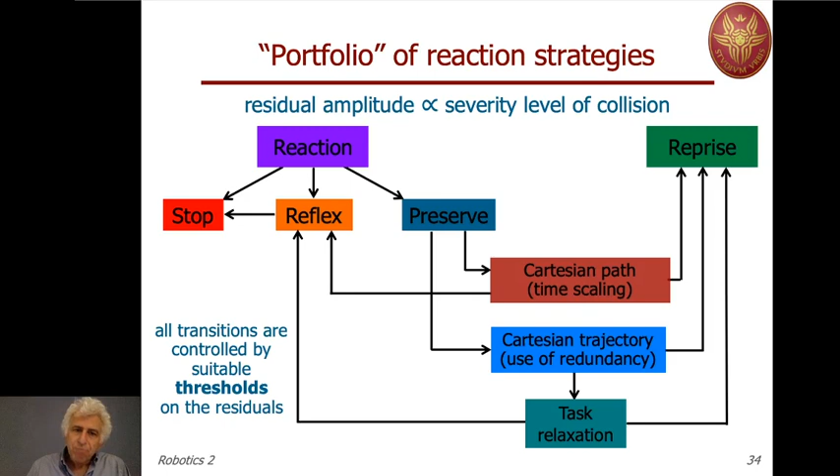The most natural reaction is called reflex reaction. But in fact, we have the possibility of doing several types of decisions based on what we are doing. This slide shows the possibilities, looking also at the amplitude of the residual, because we noticed from experiments that the amplitude is more or less proportional to the severity level of a collision.

In particular, when you want to preserve part of the original task: once detection has been recognized, you can stop definitely—this is one possibility, particularly if you're only able to do detection and not isolation. Or you can have a reflex reaction, which does not take into account at all what the robot was originally doing.

So there are other methods that try to preserve as much as possible of the original task. If you were doing a Cartesian path—or in principle also a joint path—with a given timing law, you may decide to preserve the path and rescale time, stopping and possibly reversing because of a collision or obstruction.

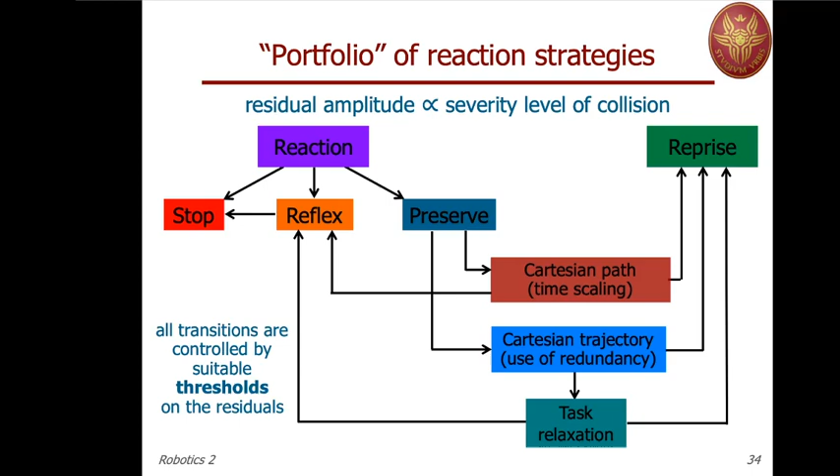Of course, you may combine them or think of something else depending on context, while these possible reaction strategies remain quite general. So let's see the time scaling and the use of redundancy with possible task relaxation approaches.

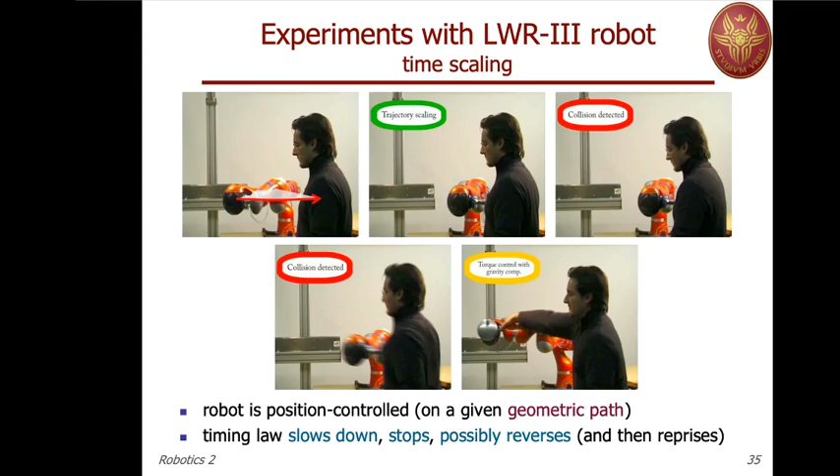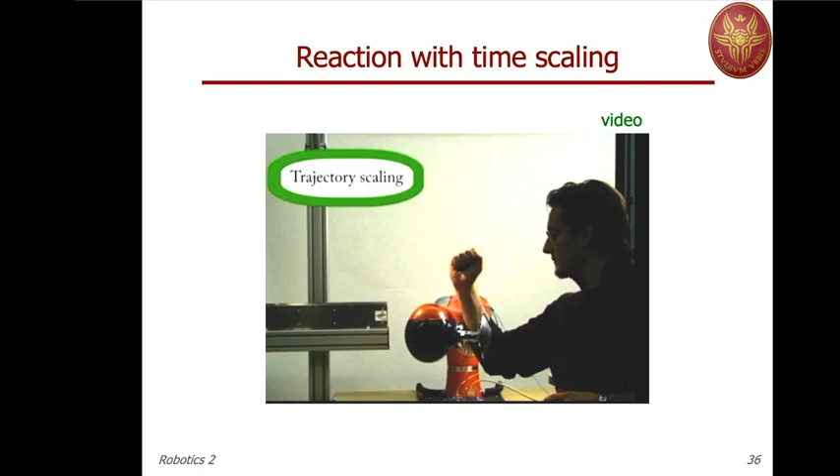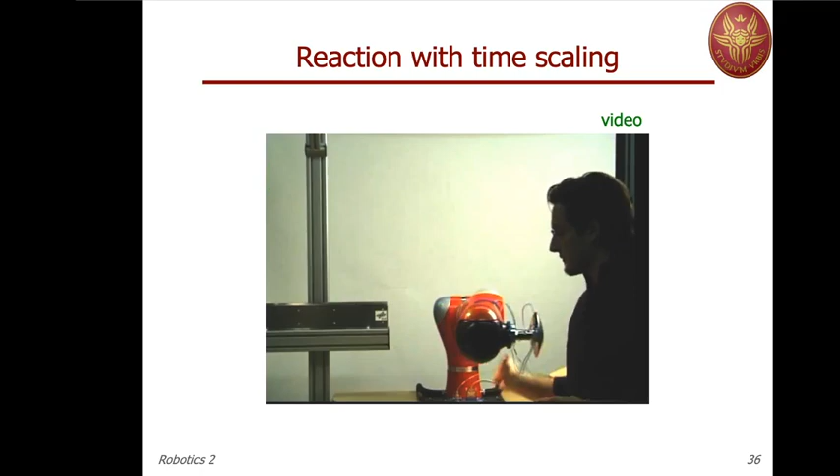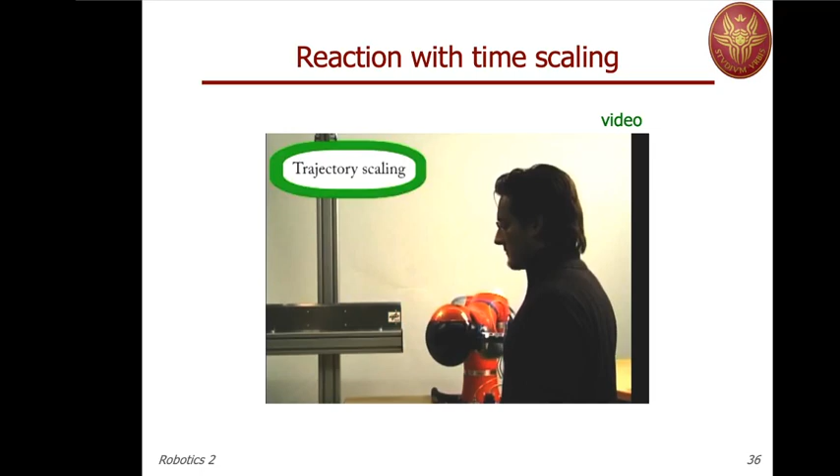In this video you will see the various possibilities—notice the interaction that occurs at contact, when the user is pushing more on the robot, making the residual grow accordingly. In this case, the robot stops, returns, and the trajectory resumes as soon as possible. But if you push too hard, you get this type of reflex reaction: the trajectory scales and stops, but with a strong push, the reflex action takes the lead and the task is fully abandoned.

So this is rather clear. This trajectory was simple, but of course you can make things more complex—you may also abandon the trajectory for a while and then recover the same trajectory again.

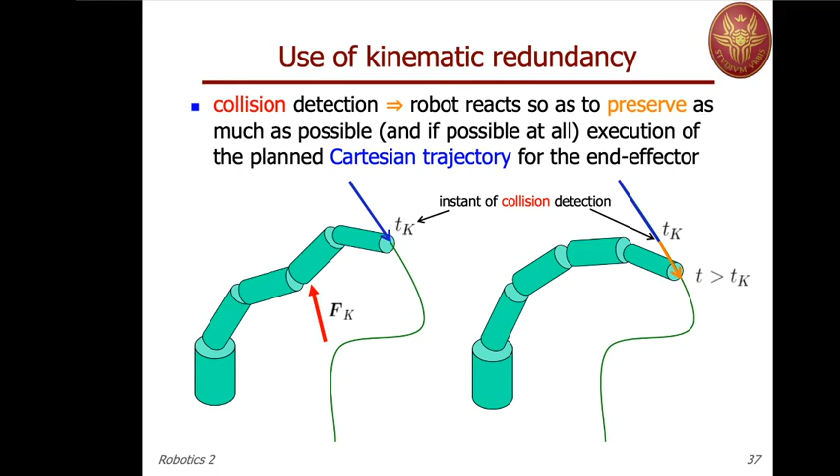Let's formulate the task in a general setting. The task is defined by some set of coordinates x, m-dimensional, and we have n degrees of freedom available, so we have redundancy. We write the Jacobian of the task, the relation between velocity in the joint space and in the task space. The task space may be the Cartesian space or whatever. We also consider the acceleration level, because we need to include dynamics now. So we have x double dot equals J q double dot plus J dot q dot. Written in reverse order, it's the same.

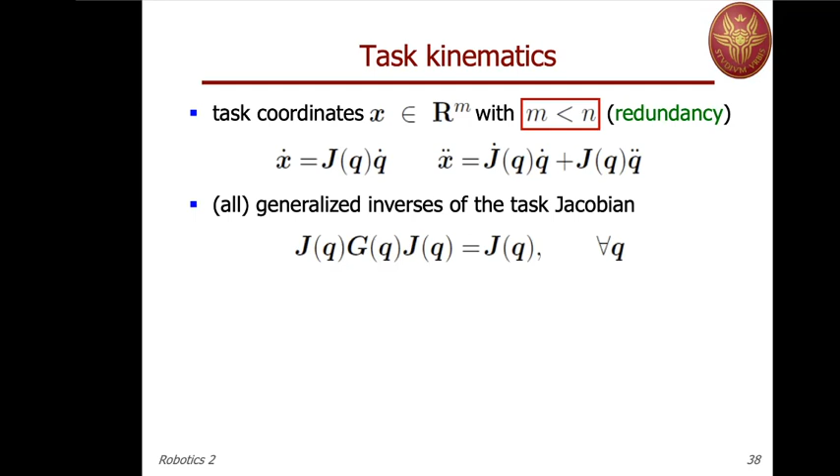Now consider, for generality, all possible generalized inverses of the task Jacobian. We call a generic generalized inverse G. This may be the pseudo-inverse or a weighted pseudo-inverse. Remember, this definition is the minimum requirement for executing tasks which are feasible, that is, which lie in the range space of J. So G is a generic generalized inverse.

Now, if you solve the acceleration relation in terms of q double dot and write all possible accelerations that realize the same desired x double dot in a given state q dot, this is the form you get. You get a term related only to the task — if G is the pseudo-inverse, the first term would be the minimum norm solution in terms of the norm of the acceleration — and then you have an additional acceleration projected in the null space. You're probably used to seeing this equation with the pseudo-inverse in place of G, but in fact this applies to any generalized inverse. You may not have orthogonality between the two terms as you do when using the pseudo-inverse, but the relation still holds.

This acceleration has as a free parameter the null space acceleration, q double dot zero. Now we plug this into the dynamic model, and since there's a one-to-one correspondence between joint acceleration and torques, when we put this acceleration into the dynamic model and compute the torque, we transform the acceleration q double dot zero into the unique corresponding torque tau zero.

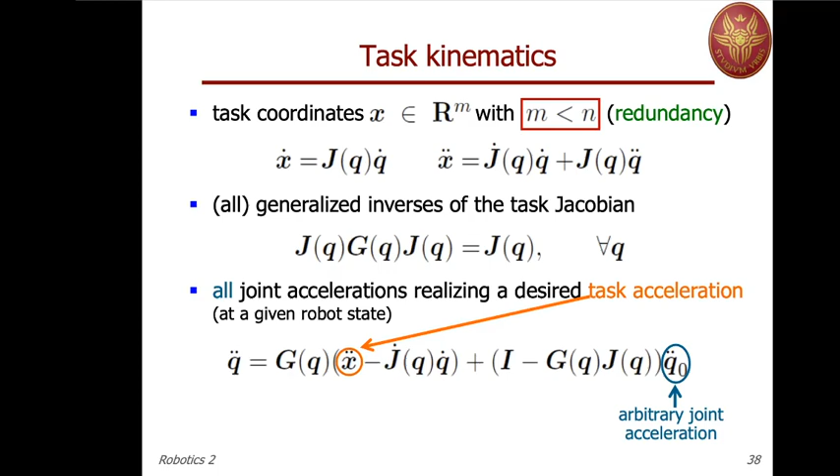So we have, in the null space of the dynamic problem, a torque that can be used for reacting. The task acceleration is given by x double dot, and these two terms are independent of each other: the first term realizes the desired task acceleration, while the arbitrary joint acceleration doesn't perturb what we're doing at the task space. This is true for any generalized inverse.

Now, for compactness of the formula, we group the Coriolis, centrifugal, and gravity terms into a single vector n of q, q dot. Then we substitute the previous acceleration into the dynamic model, and rewrite the acceleration q double dot zero in terms of the equivalent torque tau zero. We end up with this formula.

In this formula, the task acceleration x double dot follows the desired profile, and probably because of robustness and to recover any error that may have arisen, we also close a PD control in the task space in terms of the error, which is x desired minus the current x.

The long matrix that pre-multiplies tau zero is in fact a projection matrix in the dynamic null space of J. As you can see, the inertia matrix appears twice, once direct and once inverted. Indeed, the identity remains the same if you execute the product, but the second term will contain both the mass matrix and its inverse. Tau zero will be the joint torque left free for the reaction we were looking for, so we will just plug in an n-dimensional torque tau zero.

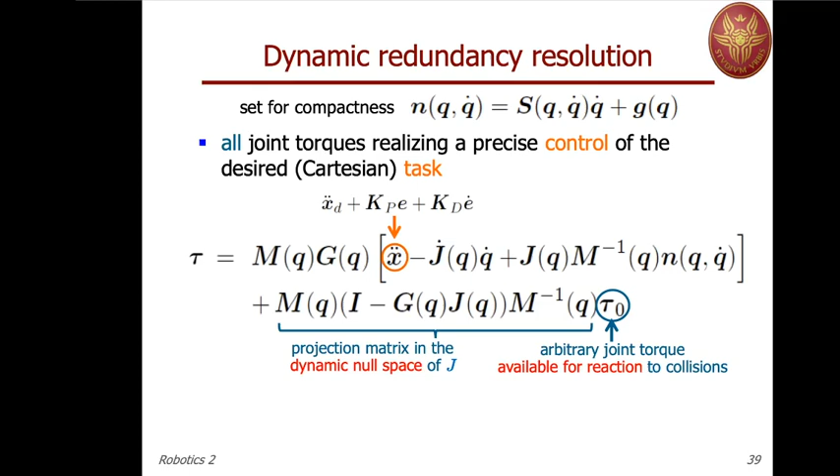If this is not the case, we should abandon part of the original x double dot, for instance the orientation part, and achieve the same type of control law. If this works, we may even reprise orientation control together with position control, or we need to abandon everything.

So the outcome of this quick analysis is that when you choose any generalized inverse, the joint torque tau may have two contributions: one for performing accurately task acceleration control, the other that does not affect the original task but is used, for instance, for reacting to collision.

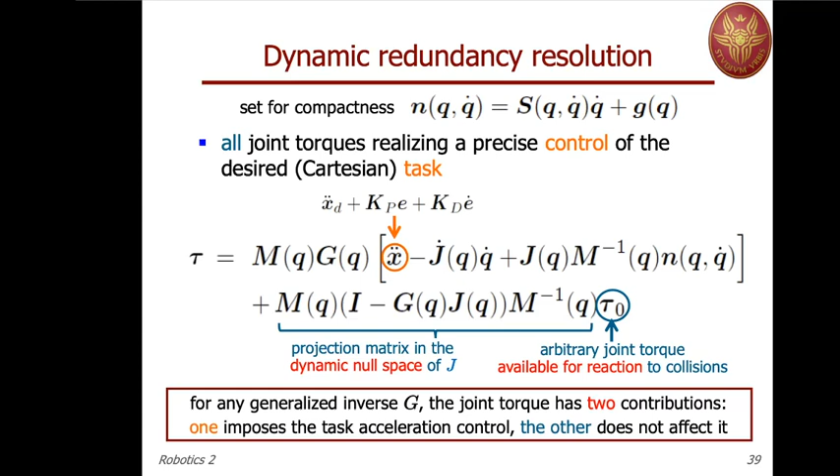Now, among the possible choices of the matrix G, it is suggested to use the so-called dynamically consistent generalized inverse of J, which is nothing else than an inertia-weighted pseudo-inverse. The methodology can be obtained by following a dual derivation of what we did at the level of velocities, finding the minimum norm solution and then the null space term, and so on.

But now we work on force transformation. Remember, we have contact force, a generalized contact force at the Cartesian level somewhere on the robot structure, and then we work in the joint space with torques. So the mapping is in general tau equal J transpose F. Now J is the Jacobian of the original task, for instance end effector motion, so it's something we know, and F is some force that will be a control force.

We can decompose any joint torque in one term coming from a force defined at the Cartesian level, which is J transpose times F, plus an extra torque of the form with a projector, where H is a generalized inverse of J transpose. So tau 0 is the additional torque in the joint space that cannot be generated by J transpose times F.

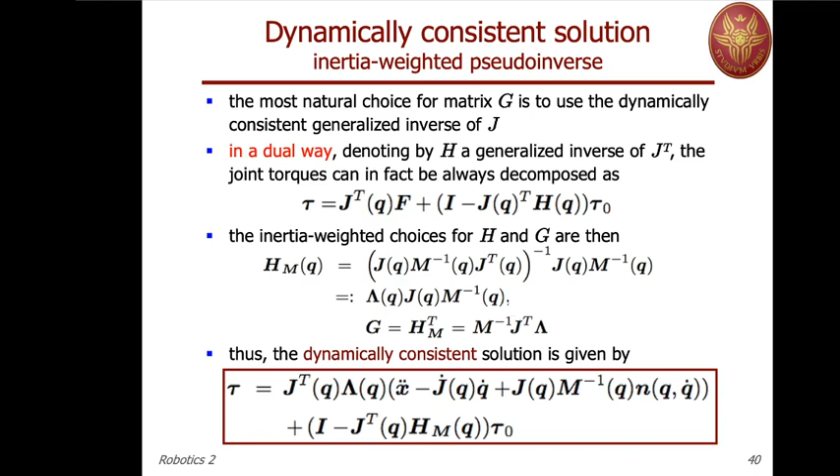The end effector should follow a straight path in position and constant orientation, while it encounters a spherical obstacle placed more or less at the level of the elbow.

If you move around the spherical obstacle, you may complete the task entirely. If the spherical obstacle is getting closer to the elbow, then you may hit it and try not to relax the task, so preserving both the linear path and the constant orientation, which is pointing downward.

But then, accommodating the force coming from the collision, namely with a reflex strategy projected in the dynamical null space that we have seen, you try to avoid continuation of this collision. If this is not possible, you try to abandon the orientation, and if even relaxing the task you are not able to reduce the residual below a certain threshold, meaning you're forcing motion against the colliding object, then the task is fully abandoned, because we give priority to safety at the end.

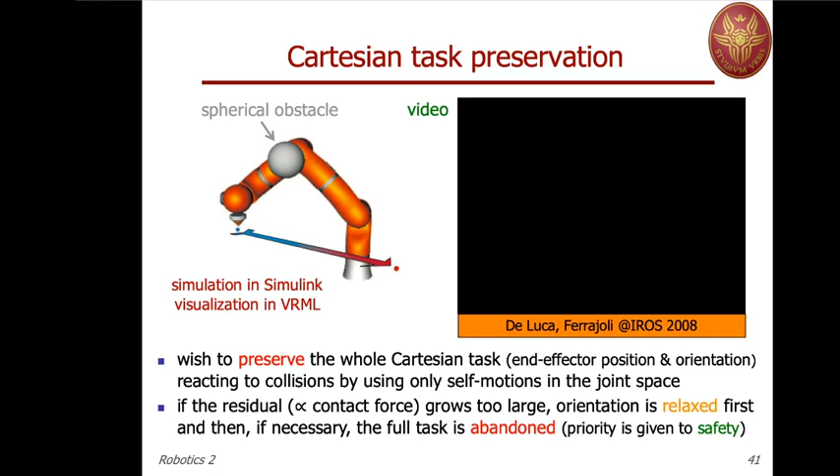Now, many years later, after this simulation of 2008, we performed also an experiment with our lightweight arm in the lab. So here there are more things involved. We use, by the way, an admittance controller in order to move the arm. So the method is slightly different from what I presented, but the results, I think, are very clear.

So here there are 3 situations. The idle situation is when, in green, the robot is doing its task as planned. The relaxation is abandoning in part the task, and abort or abandon is when the task is completely abandoned.

The difference is that the human is now interacting with the robot, and when the robot needs to abandon its task, it follows the human under the action of an admittance control. So the force that the human is exerting on...

the robot is being detected and estimated by the residual at the joint, and this residual is treated like torques, and the torques produce some velocity. In this sense, this is an admittance controller. Let's see the video and understand what's going on.

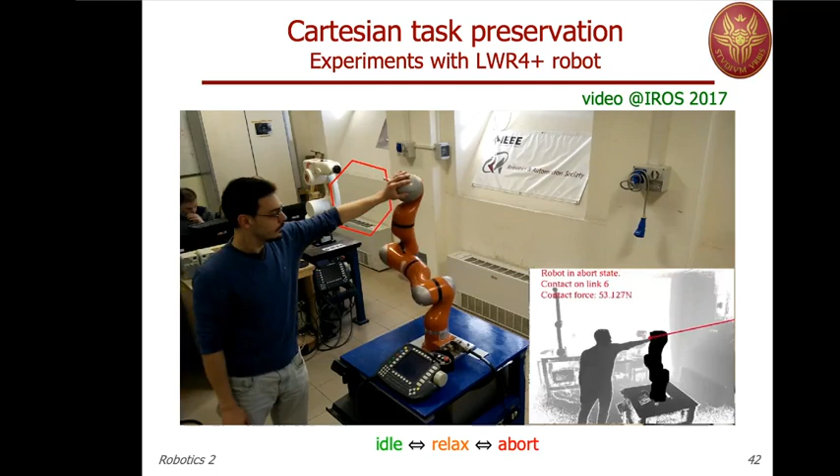You see that the robot has abandoned completely the task, but then it recovers and restarts the task from where it was left.

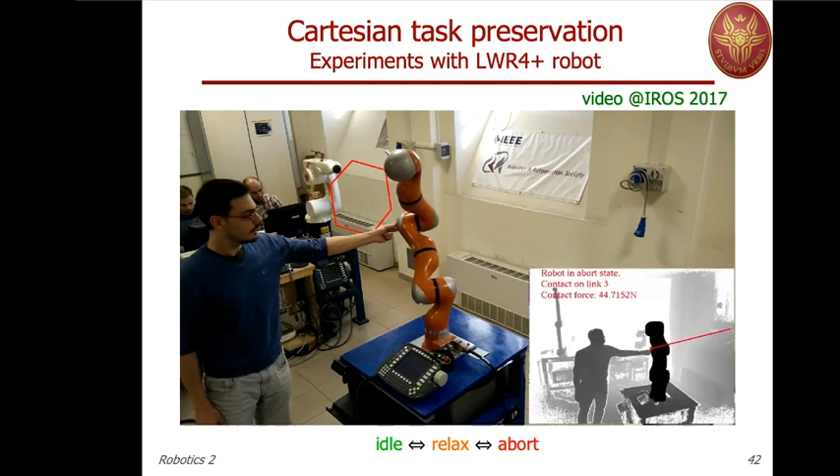Again, contact on link 3, the robot abandons the task completely, and returns to where it was abandoned. And there's also an estimation of the contact force. We will see this method in detail, how to estimate the contact force similarly.

This is a relaxed state, so the position is kept until possible, and then the abort state. And the contact may occur at any link. You see that there's also a Kinect overlooking the scene.

Here you see a typical case in which the orientation is abandoned but the position is kept, so the relaxed state, until this position where the robot is not able to follow the path. And so it abandons it while recovering as soon as the residual has come back to zero.

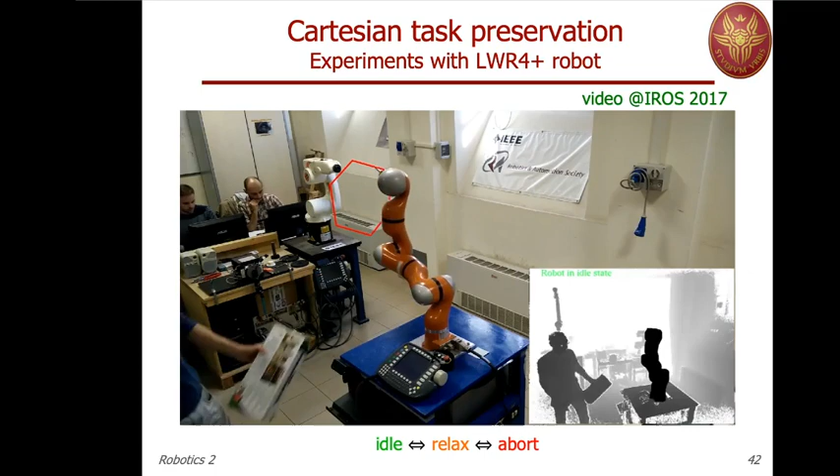In this video there was more because there was an explicit estimation of the contact force that is used for collaboration, and this will be the topic of our next lecture at the end of this one. Okay, so indeed there are other possibilities that can be explored.

In particular, it's very interesting to distinguish intentional interaction, which may be associated to an obvious contact between the human and the robot, for instance shaking hands, from unexpected collision. The intentional interaction should be treated in a way that is collaborative, while unexpected collision, we should react completely, like we have done so far.

Now, if you include in the robot also joint or force sensors, and if the intentional interaction occurs at the level of the end effector, then the situation is easier. In fact, you can include the measurement from the force sensor in your model, so J transpose times the measured forces, and if you put them inside the residual...

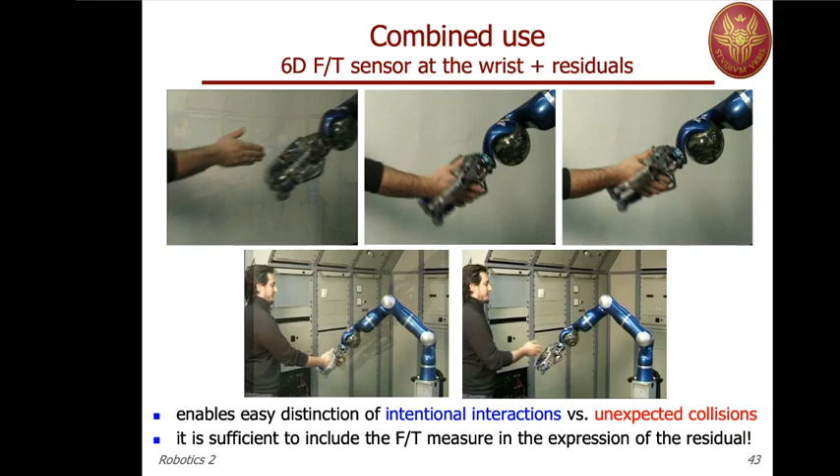then of course whatever force is being measured at that level is treated as the desired one, not a collision. So you can distinguish it quite easily if you know that the intentional interaction occurs at the end effector level and if you have a force sensor. We will see more about collaborative tasks in the last lecture.

I would like to conclude this part by mentioning another work we performed in our lab on the KR5 robot, an industrial robot with closed control architecture, where we try to do collision detection and possibly reaction and collaborative behavior if we recognize that the contact is intentional, even without a dynamic model, access to torque or current as commands. Our program interfaces to the low-level control law of the robot by just giving reference command QR dot externally, working with a very slow interface that provides data every 12 milliseconds.

As you remember, when we ran the experiment on collision detection on the DLR ARM lightweight 3, we had a sampling time of 1 millisecond. So here we are at least 12 times slower. This is, let's say, the poor man's version of what we have tried to develop on the research robots.

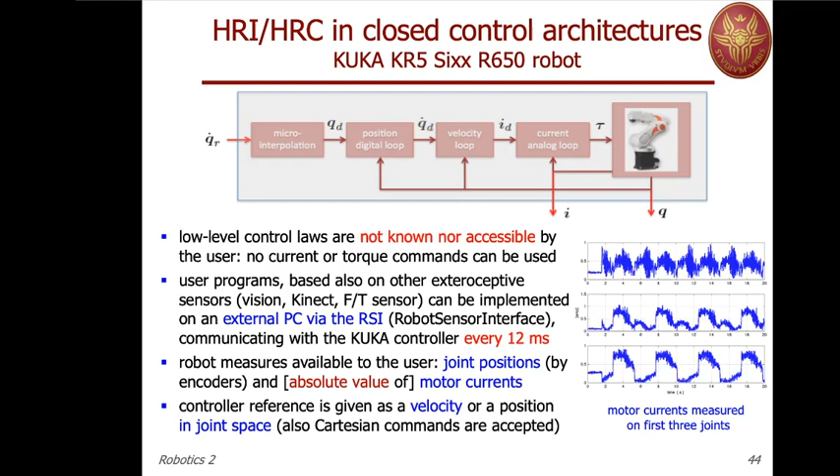Nonetheless, we were able to do collision detection only. When we collide, the motor current will change, but there is no one-to-one relationship between which motor current changes and which link you collided with. So only detection is possible, not isolation. The only reaction we were confident to implement was stopping.

Here on the right hand side you see the current profile for joints 1, 2, and 3. You see in red some trajectory-dependent threshold. When we exceed this threshold, at least one of these signals exceeding it means we recognize a detection and the robot will stop.

You will see the parts of these plots highlighted in correspondence to when in the video the user is colliding with the end effector of the robot. The robot makes a periodic motion just to keep it moving, and there is a high pass filtering analysis of the motor current. So we are really doing a detection which is not model based but signal based, as opposed to what we have seen so far for collision and actuator fault detection and isolation.

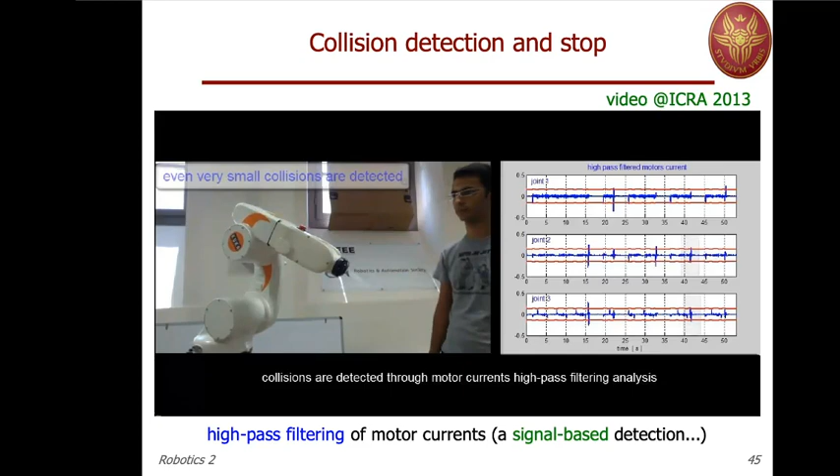So, for instance, this last collision occurred near the end effector, but only joint 1 current exceeded its threshold. So it has nothing to do with where the contact occurred, and of course this is really a system with a minimum amount of information available for measurement. Still, we decided to go farther.

First of all, the trajectory dependence of the threshold is important because since we are only working with signals and no model of their generation, we needed at least to have low threshold when we were moving slow and higher threshold when we were moving at faster speed. So this is one reason for that. In fact, the threshold has a strange combination of the desired current, desired velocity and acceleration. Still, the idea of filtering the current comes from an observation.

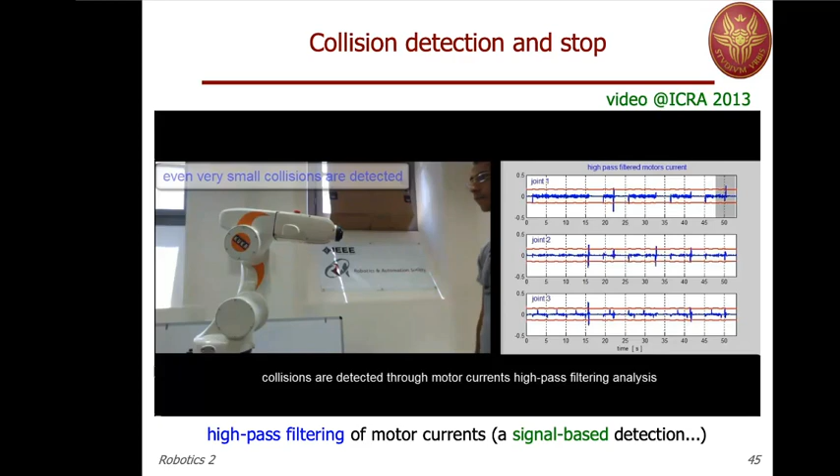Usually collisions are hard collisions, so they generate impulsive or impulsive-like peaks, like you can see from this profile. So the high-pass filtering forgets whatever happens at low frequency and is being excited by this collision. On the other hand, if you do a low-pass filtering on the same variable, you can recognize soft contacts, those that will not excite the high-pass filter, but still excite the low-pass filter.

So you can imagine distinguishing accidental collisions, which are hard, from intentional contact that are soft. And once you recognize an intentional contact, you may switch modality, so reconfigure your controller and start to collaborate. Remember that the controller still remains for us a kinematic controller because we can only specify some reference velocity, q dot r, outside.

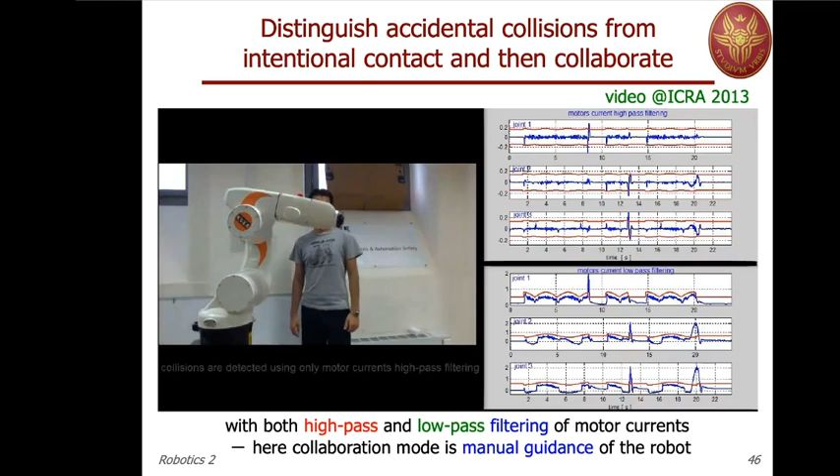So here now in this second experiment, you see on the right hand side the high pass filter motor currents and the low pass filter, which are even more dependent on the trajectory being executed. The first situation will be a collision detection, so stop a couple of times, and then there will be a soft contact. So this is a hard contact.

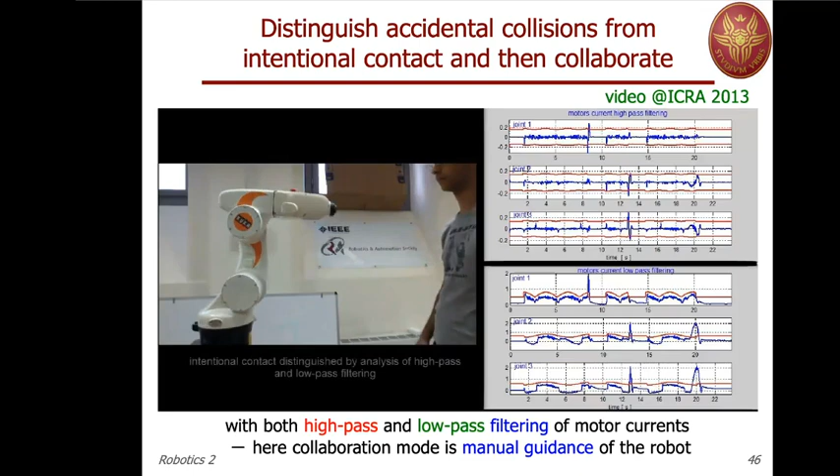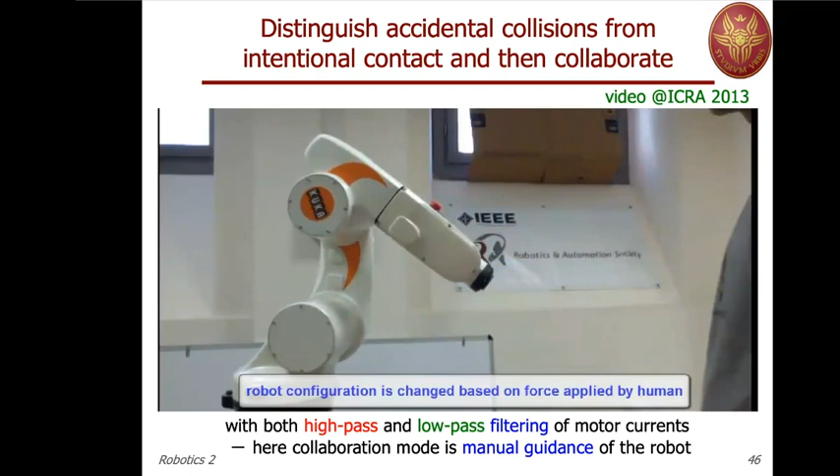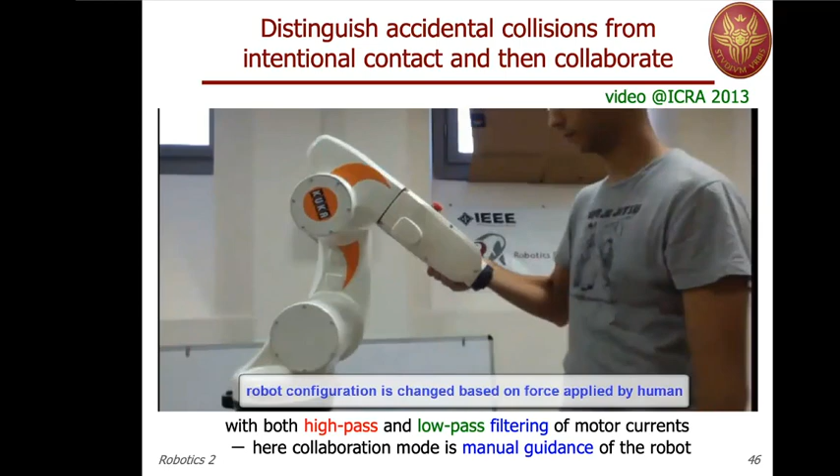Remember that in this modality, the robot is working in its regular modality, so it's not a special mode. We are changing reference at the joint level, recognizing in which direction the robot is being pushed by looking at the small increment of the encoders and then commanding a velocity in that direction. So we are kind of cheating the controller and also the users, in the sense that what you see apparently seems a torque command by this kinematic control.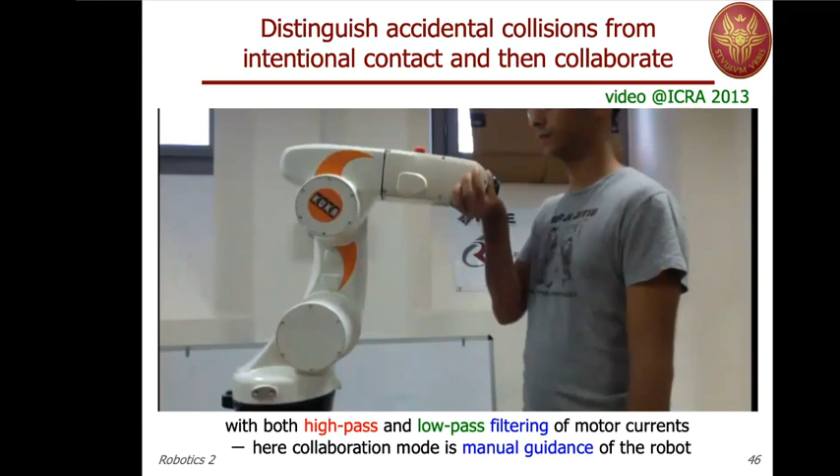And there are more ways in which you can achieve collaboration once you have detected an intentional contact. For instance, in this first of the two videos in this slide, there will not really be a manual guidance, but just a reaction by a small force. We will command a large velocity reaction and then stop. So this is pushing and pulling the robot in this way.

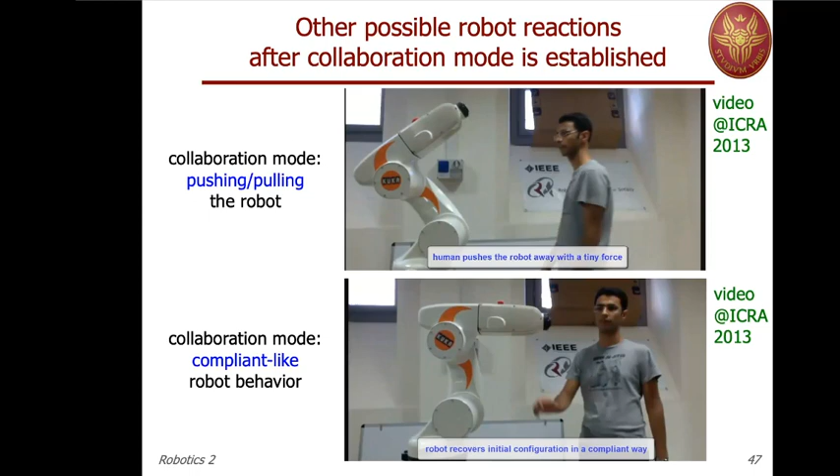So again, you stop it in a soft mode so that the robot understands that from now on it should collaborate, and then we program the pushing-pulling modality. So with just a tiny force, a finger, the robot will be pushed away or pulled in the other direction. Now this requires some programming, of course, but the behavior is quite natural.

And if you remember now the video that we have seen with the robot interacting with the environment, for instance the compliant control, where we were able to apply also moments like this. If you remember the compliant control that was implemented, I have shown a video from the laboratory of the University of Naples, in which you can realize compliant-like behavior, in the sense that without using the force sensor, the robot is reacting

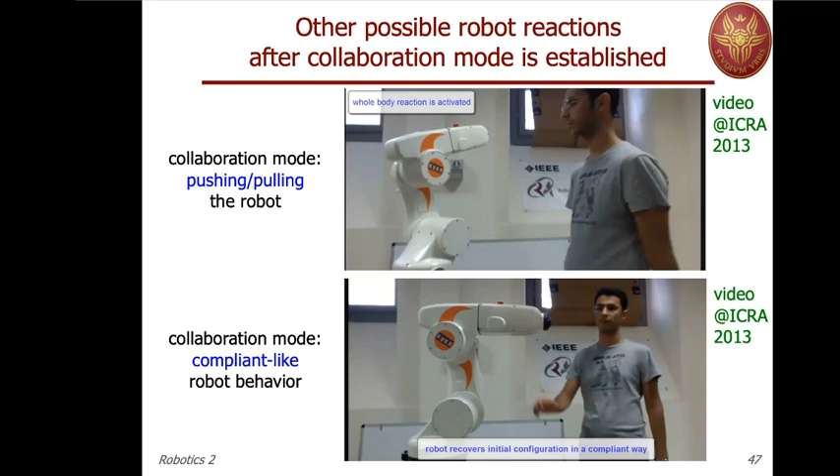in a spring-like fashion. But in that case, we were able to, and they were able to, impose current, so torques at the motors, and let them behave in this proportional way. Here we don't even know what is the low-level controller. So the only thing that we can do is modify the external velocity reference. Still, we can achieve compliant-like behavior in this fancy way.

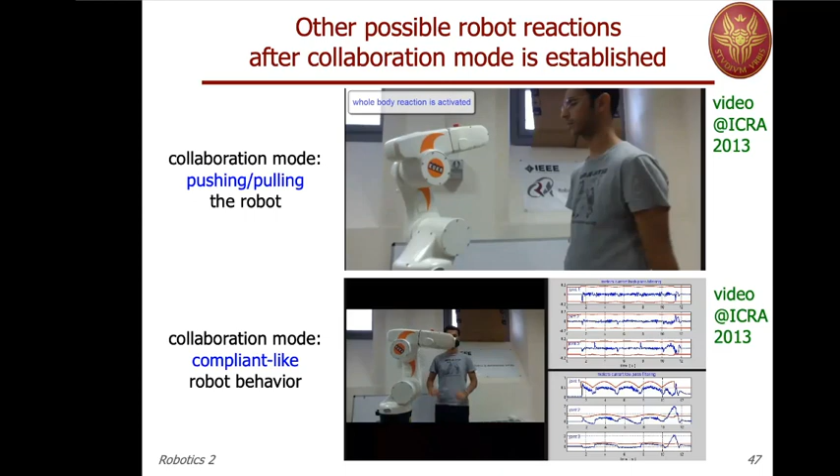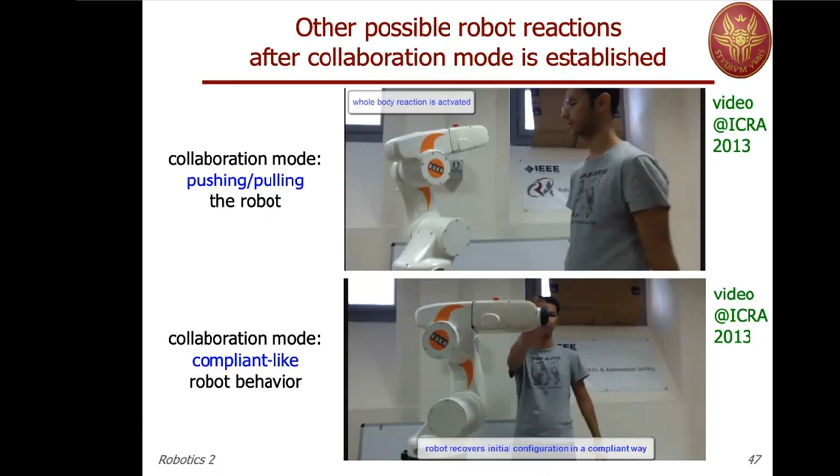So again, the robot will be stopped in a soft modality. And you see that the motion is like having the reference position as 0 and then reacting like a spring in the various directions. But this would generate a torque, but we are not able to impose this torque, so we have to mimic it by a specially designed command at the joint velocity level.